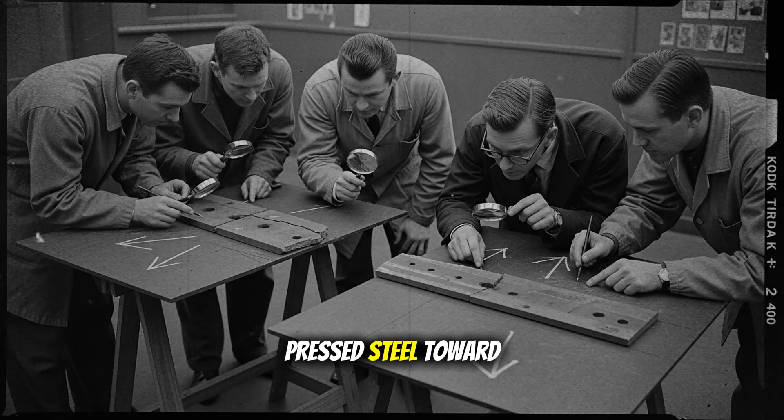The anxiety had been growing as winter spread down from the North Pacific and across the North Atlantic, places where water temperatures pressed steel toward its hidden limits and turned minor flaws into fatal lines racing through a hull. The Schenectady's break, the newspapers noted, came in calm weather just after sea trials, which only deepened the dread. If a ship could break here, what awaited her sisters on the open ocean?

Out at sea, proof would come with merciless clarity on November 24, 1943, when the Liberty ship John P. Gaines broke in two off the Aleutians and sank with 10 lives lost, a catastrophe later tied to the embrittlement of welded steel in freezing waters where toughness vanishes and cracks run unchecked.

Investigators and metallurgists began naming factors: steel quality, workmanship, temperature, stress concentration, while a pattern emerged: ships with long, continuous welds and sharp structural details were prone to sudden brittle failure when cold stripped the metal of its ability to absorb strain. Even near New York in March 1943, the tanker Manhattan reportedly broke in two, underlining that the menace was not confined to a single yard or coast but haunted the entire war-built merchant fleet when the thermometer fell and the stress found a corner to concentrate.

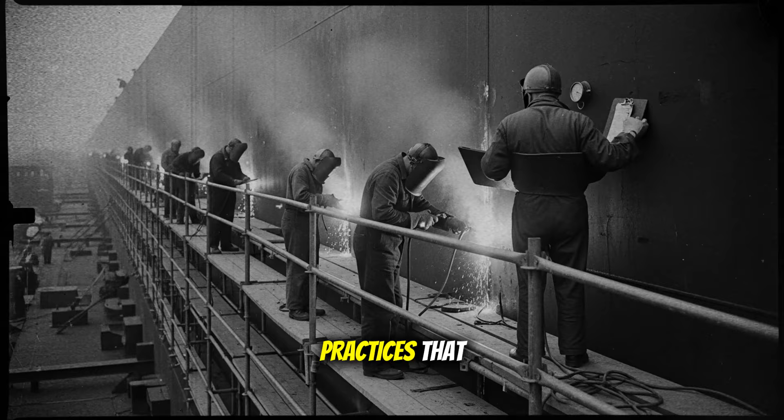The first official explanations leaned on familiar culprits: faulty welding and rushed work, because it felt intuitive that speed had simply outrun quality, and early reports pointed to poor practices that undeniably existed in some yards under punishing wartime schedules. But as the evidence grew, the narrative shifted from blame to mechanism.

What looked like isolated workmanship errors were, in many cases, symptoms of a deeper physics: the brittle fracture of low-toughness steel at low temperature, ignited at sharp corners and accelerated by continuous welds that handed a crack a clear path. Welded construction eliminated the riveted discontinuities that once acted as brakes, so a fissure born at a square hatch corner under residual tension could sprint across a deck and down a side shell before frames or bulkheads could arrest it, especially when the steel's ductility had collapsed in the cold.

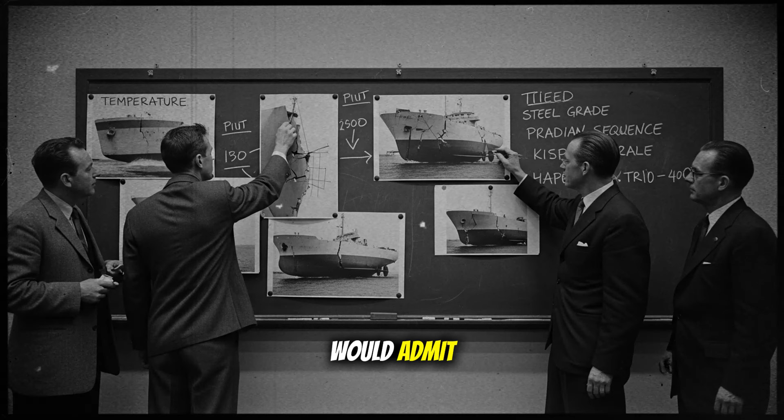That cold mattered more than pride would admit, because steel that bends and forgives in a temperate yard can turn glass hard at sea, crossing an invisible threshold where toughness drops and tiny notches, tool marks, square cutouts, abrupt geometry become amplifiers of stress rather than mere imperfections. In those conditions, a weld's heat history and the sequence in which plates are joined can lock residual tensions into the hull, hiding stored energy in quiet steel until a winter night and a sharp corner give that energy a perfect release.

The shock of the Schenectady's fracture forced leaders to stare at this convergence of design, material, and method, because the ship had met specifications and yet had failed spectacularly, which meant the specifications themselves might be asking the impossible of the metal and the sea.

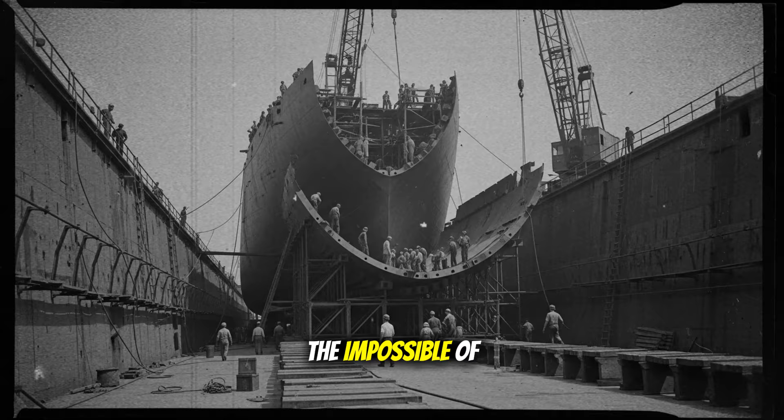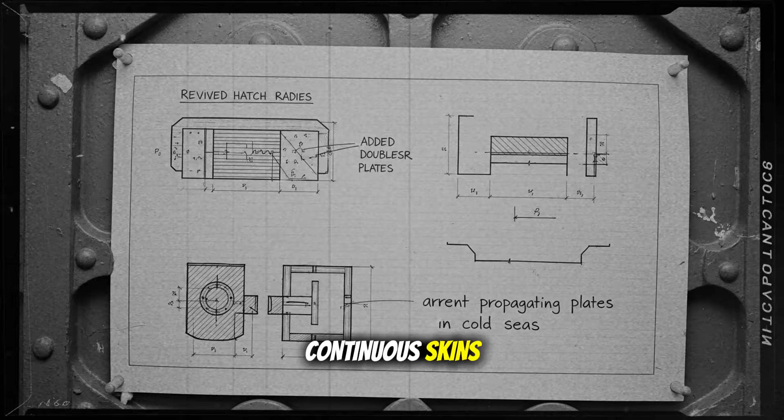Behind the headlines lay the industrial gamble that made such failures possible at scale: an unprecedented shift from riveted to welded ships, prefabricated sections marching across assembly lines where speed was the mission and cargo tonnage the weapon, all orchestrated by new yards like Kaiser's on the American West Coast. The Liberty and T-2 programs had proven that ships could be built in weeks, not months, by welding vast steel plates into continuous skins, a miracle that poured hulls into the Atlantic faster than U-boats could sink them, until cracks began to show that speed carried its own invisible toll.

What rivets once interrupted, welds now connected seamlessly. What corners once rounded slowly by craft, production sometimes squared and punched for efficiency, and the ocean, indifferent to schedules, found every shortcut the moment the mercury fell.

For crews, rumors hardened into fear, because sailors knew that a hull could fail not with a gradual groan but with a single rip, the ship's back breaking in seconds as if an unseen hand had unzipped the steel from hatch to keel in frigid water far from help.

They learned to listen to the language of their vessels, the clicks and thuds and winter creaks, and wondered which sound was harmless and which marked the birth of a crack that would not stop until it met a discontinuity or the sea itself.

Every voyage through cold lanes became a test of unseen properties, of materials and methods decided in yards thousands of miles away, where a choice about a corner radius or a weld sequence might ripple into life-or-death outcomes at latitude 50 north.

The Schenectady's broken back on a quiet river became the emblem for a crisis bigger than one ship, compelling investigators to convene, comb through fractured plates, and re-examine everything from steel chemistry to hatch geometry and the choreography of welders on the line.

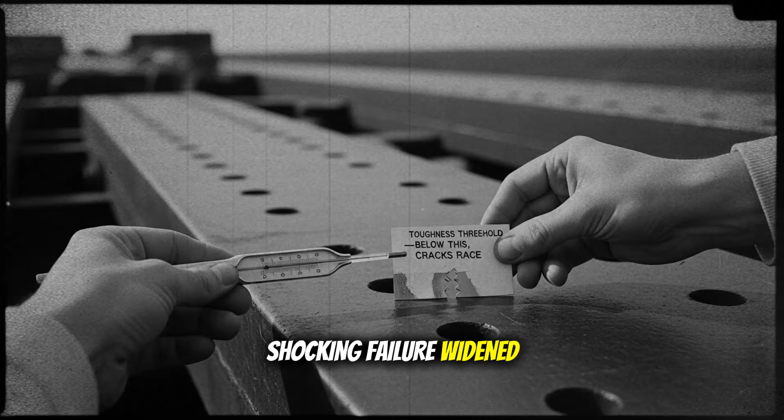What began as a story of a single shocking failure widened into a forensic journey through modern shipbuilding, asking not only what failed but why it failed there and then, and what must change if a nation's lifeline is to survive its own ingenuity.

The answers would take shape in new procedures, new shapes, and new steels, but in that first stunned moment on the Willamette, all anyone could see was a ship torn open by silence and cold, and the realization that the ocean had found a flaw in the way a war was being won.

In the months ahead, the inquiry would turn from spectacle to science, crossing the gap between yards and seas, and laying the groundwork for a transformation that would keep ships from slicing themselves apart when winter pressed down and waves hammered square corners into stress and then into rupture.

Yet part 1 ends where the mystery begins, with the shock, the questions, and the sense that something fundamental about steel, shape, and sequence had been misunderstood, because the ocean had just delivered a lesson no one could afford to ignore.

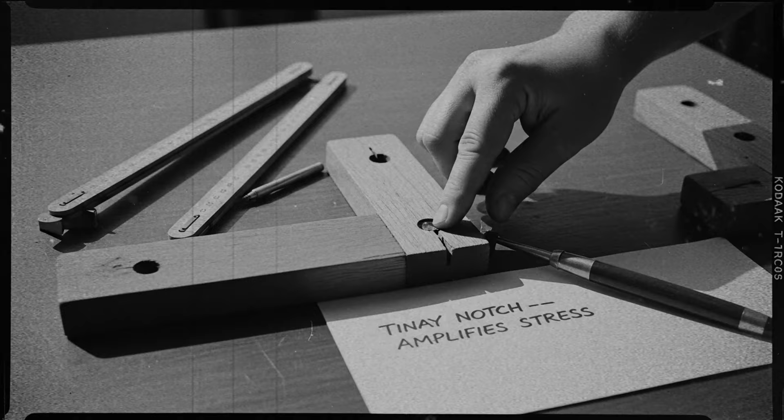The hull on Swan Island was not simply a broken ship, it was a message in twisted plates and a mile-wide echo that demanded a new way to think about building vessels that live where water is hard, wind is sharp, and mistakes travel at the speed of fracture.

In the months after Pearl Harbor, the mandate from Washington was simple and brutal: ships must appear faster than the ocean can swallow them, and Henry J. Kaiser stepped into that order with a promise to bend time itself by turning shipbuilding into a choreographed factory of prefabricated parts and welders moving like clockwork around steel.

He did it at Richmond, California, where 5 quays and a sprawling grid of sheds and warehouses became the bones of a new idea: take the rhythms of Detroit and bolt them onto the waterfront, so that hull sections, deckhouses, and bulkheads could be built all at once and then swung into place by giant cranes with scarcely a pause between. The result was a spectacle of speed.

By late 1942, Liberty ships averaged roughly 6 weeks from keel to launch, a number that sounded like rumor until yards began to post build times like boxing posters, daring each other to beat the bell again and again.

The headline belonged to one ship, the SS Robert E. Peary, assembled in an astonishing 4 days, 15 hours, and 29 minutes, a feat so improbable that it needed no embellishment, just the dates and hours stamped beside photographs of crews in quilted jackets and paper caps watching a hull glide toward the water.

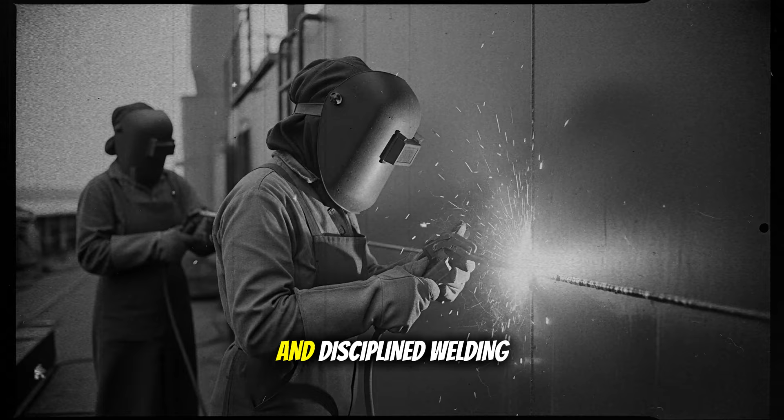Record keepers would later anoint it formal, the fastest completion of a full-sized ship ever, proof that prefabrication and disciplined welding could make steel obey a schedule as if it were a living thing trained to the whistle. But perhaps the more telling number was not the record, it was the typical.

By 1944, the Liberty ship assembly rhythm in Richmond had compressed to a little over 2 weeks, as if the yards had discovered a metronome hidden inside the work itself.

At ground level, the secret was not magic, it was movement, the way pre-made sections arrived like clockwork, lifted by cranes from flat cars and cradled into alignment while welders stitched seams in a sequence designed less by old-time shipwright instinct than by production planners armed with charts and stopwatches.

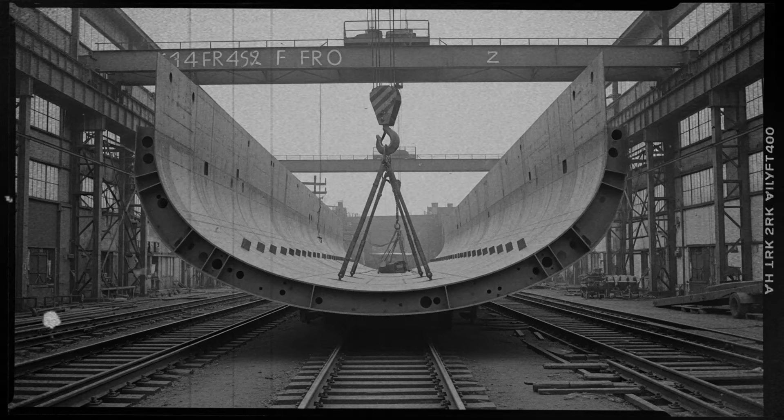Where once a hull grew from the keel upward under a forest of scaffolds, now entire bow and stern modules, engine room blocks, and deckhouses took shape in separate bays, converging on the ways like a convoy timed to the minute.

Kaiser's yards became their own geography of motion, moving steel instead of asking men to climb it, and in that inversion lay the speed that would stuff convoys with cargo when the Atlantic needed ships more than it needed elegance.

The workforce was as new as the method, a mobilization that redrew the boundaries of who could build a ship and how quickly they could learn to do it, with thousands of women, Wendy the Welder in Richmond's parlance, taking up torches and grinders and learning to read heat and fill a seam with the calm certainty of craftsmen who had never imagined such hands at such work.

By 1943, women made up roughly a third of the 90,000-strong Richmond shipyard workforce, sharing the same risks and the same grit, and proving that what mattered most in a crisis was not tradition but throughput, not pedigree but the steady glow of a clean bead in the right place.

The symbol the nation chose was a name and a rolled-up sleeve, Rosie the Riveter, but in Richmond the icon wore a hood and gloves and answered to a foreman with a sequence card, and the ship slid down the ways right on time. Scale magnified everything, including pride.

Across Kaiser's four Richmond yards, more than 747 vessels would be completed, while the broader Kaiser system delivered 1,490 ships, over a quarter of U.S. Maritime Commission output, proving not only that the system worked, but that it could be replicated and multiplied until the schedule itself felt like a weapon.

Those statistics are not mere tallies, they are the minutes saved in the assembly bays, the trains that pulled in with prefabricated pieces at dawn, and the cranes that never idled, because idle cranes threw shadows on a war that could not afford them. Every improvement, jigs that caught a plate at the right angle, dollies that turned a section in seconds, a better sequence for attaching stiffeners, stole hours from the calendar and turned them into hulls in convoy.

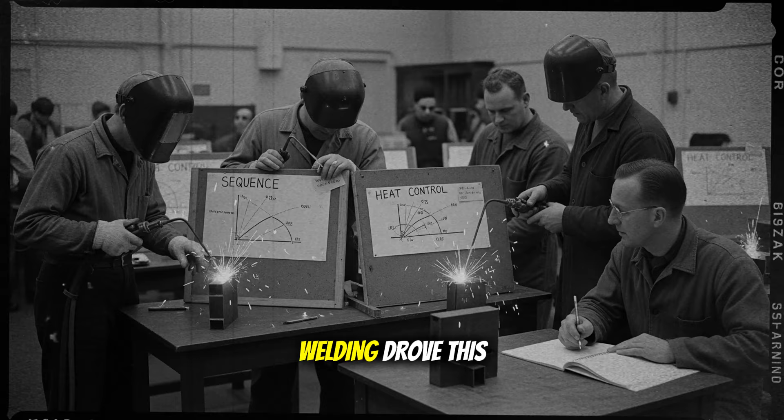The logic of welding drove this revolution as much as the logistics did, because welding closed seams in a single skin rather than lacing plates together with 1,000 hot rivets, and that continuity meant fewer leaks, cleaner interiors, lighter overall weight, and simpler assembly, boons large enough to sweep away the last reservations of those who loved the old ways.

Prefabrication and welding were twins. You could cut and shape a section under cover, fit it to a template, and then carry the whole to the ways and stitch it to the ship in hours, something no riveted tradition could match at that scale and speed. The human body understood this faster than the textbooks.

Welders moved less, repeated more, and the work flowed, miles of seam tamed by repetition until the heat and the puddle felt like a second language.

Propaganda reels and front-page photos celebrated it with an almost carnival glee, American industry conquering time, and the nation believed because it had to believe that one more line of ships would lift the siege on Britain and drown the U-boats in tonnage and wake.

Liberty was no accident of naming. The ships were political vessels as well as cargo carriers, proof that a democracy could become an assembly line long enough to reach both oceans and steady enough to keep its promises.

If speed was a melody, then the chorus was manpower made manifest, brown and black and white, men and women, migrants and locals, all trained to the same sequences in the same bays under the same war-sized clock.

And a crack, born of cold or stress or a sharp corner, prefers a road that does not stop at the next plate but goes on and on until something interrupts it.

Riveting, by contrast, had once littered a ship with intentional interruptions, hard little commas that forced a crack to pause and dissipate, while a welded plate could carry that same crack like a rumor whispered room to room until the whole house knew. None of that was clear in the first dizzy months of scaling up, and perhaps it could not be, because factories do not produce caution, they produce output, and the war measured output in hulls per month and tons per mile, not in the long quiet of a ship flexing safely through winter seas.

The specifications were met, the seams passed inspection, and the schedules turned over like calendar pages in a stiff wind, and then winter came, and with it the revelation that steel has a season and a temperament, and that speed's shadow is the margin it erases.

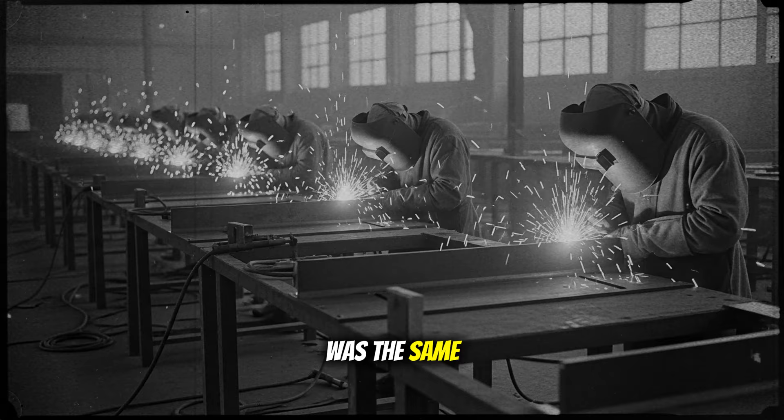Inside the yards, the answer to every new problem was the same as the answer to the last: train harder, move faster, tighten the choreography, and for a time it worked, because movement itself can drown out doubt until the ocean raises its hand.

Rail spurs fed the prefab sheds, and the sheds fed the ways, and the ways fed the river, and on the river a ship became a rumor of its own journey, headed for convoys that needed every ton of flour and fuel they could carry, because the calculus of war was cruel and simple: cargo delivered meant lives saved.

Nights in Richmond, crews lit the sky with orange, chalking out welds by arc light and coffee, learning to feel the pull of cooling metal and to stitch plates without tearing the geometry that planners had arranged by the book.

They could not know that the book itself still needed a chapter about cold and corners and the speed at which a fissure can learn to run, a chapter the ocean would write in gray water and black moonlight far from the whistles of the bays.

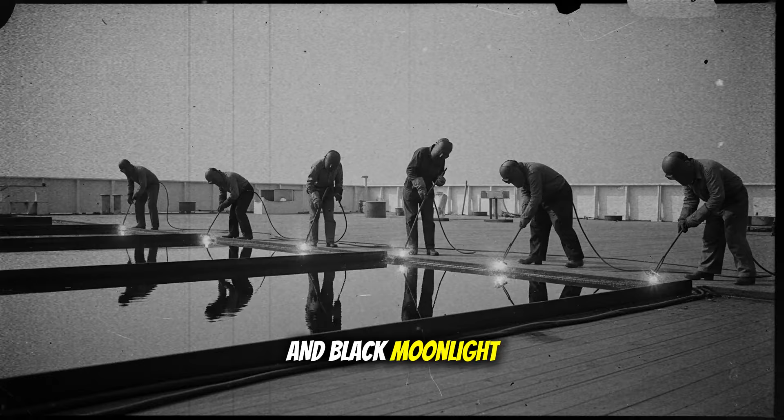Even so, the achievement stands: a nation that had never built at such velocity taught itself to do so, and the evidence was a forest of masts at anchorage and a river of ships sliding off greased ways in Richmond, Portland, and beyond, each born of 1,000 small, repeated motions that made extraordinary feel ordinary.

Speed was not an accident, it was a decision, and the decision brought victory closer by the calendar even as it crept near the edge of what the steel would tolerate, a line unseen until a crack drew it in bright, jagged relief.

What came next would be the second lesson of the war-built fleet, that a miracle of production must be followed by a miracle of understanding, or else the ocean will take back what the factories gave, one quiet night at a time.

The mystery deepened in the months after the first dramatic breaks, because the welds gleamed, the inspection stamps were crisp, and on paper the ships met their specifications, yet hulls still fractured as if made of porcelain when winter bit the steel and a small flaw found a path to run.

Designers pointed to proven plans and qualified materials, and inspectors swore their gauges were honest, but the ocean was not impressed by paperwork, and each new catastrophic crack suggested that something fundamental in the physics of cold steel and continuous welds had been misread.

What began as a suspicion of sloppy work matured into a more unsettling idea: the failures might be structural and environmental, not moral or disciplinary, meaning that even good welds and correct plates could be betrayed by temperature, geometry, and the way stress concentrates at certain shapes.

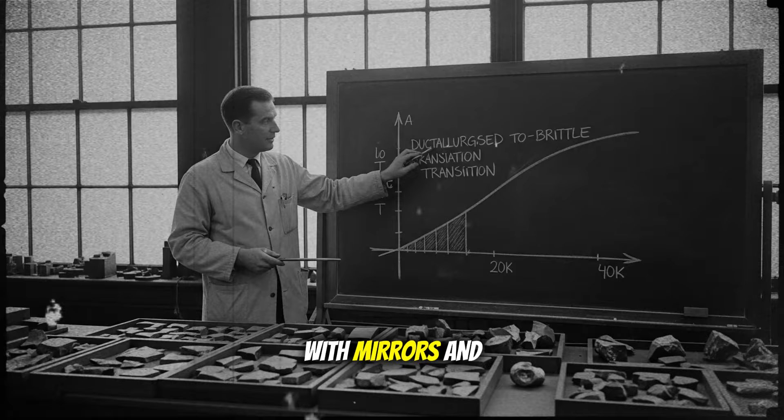Investigators crawled through broken ships with mirrors and chalk, tracing the birthplaces of cracks and finding them again and again at stress risers, square hatch corners, abrupt cutouts, welded intersections, places where the steel's internal loads piled up like traffic onto a narrow bridge with no shoulders.

Each corner acted like a magnifying glass for stress, and when winter chilled the plates toward the ductile to brittle transition, those amplified stresses no longer dissipated through yielding but snapped suddenly into a running fracture that outpaced any human response.

In warm yards the metal bent, in cold seas it broke, and the difference was not a moral failing of a worker but a material truth about toughness, temperature, and the way a continuous welded skin leaves a crack with nothing to interrupt its journey.

Metallurgists reached for language that could hold these events, pointing to notch toughness and the Charpy impact test to explain why steel that absorbs energy at moderate temperatures can surrender that toughness near freezing, turning stress into a clean break rather than a dent or a bend.

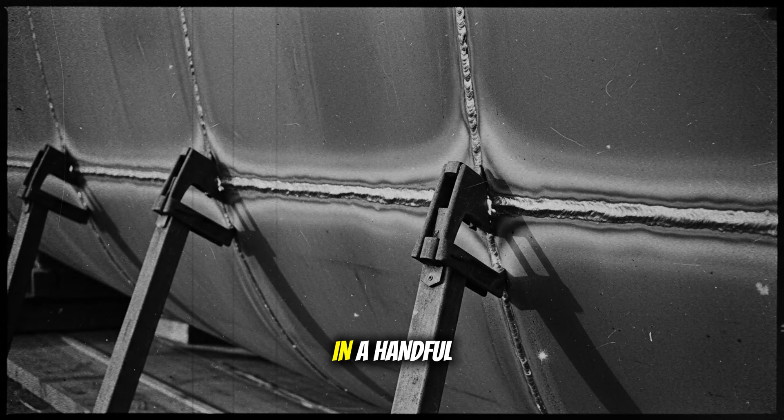They spoke of the ductile to brittle transition not as a switch but as a range, a band where a plate can move from forgiving to treacherous in a handful of degrees, and where defects that were once harmless become seeds of catastrophe when the ship crosses that invisible thermal border.

The conclusion was unnerving in its simplicity: if notch toughness at service temperature is too low, a sharp corner or a weld flaw can become the trigger for failure, and a welded hull gives the fracture a highway rather than a maze.

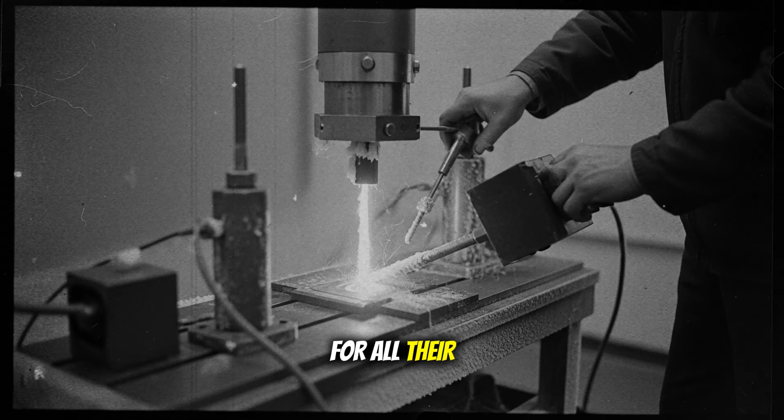This is why riveted ships, for all their weight and leaks, seem to resist the same kind of runaway failures. Rivets and lapped plates built discontinuity into the structure, forcing cracks to pause and spend themselves at each mechanical joint rather than sprint through a single, continuous seam.

By contrast, welded construction, the miracle that made mass production possible, created uninterrupted paths across decks and side shells, pathways along which a crack, once born, could travel until it met a boundary strong enough to stop it, which often came too late in the cold.

Speed had removed the commas and periods in the steel's grammar, and when the sentence of stress ran on in winter, it ended with a jagged full stop that no one wanted to see.

The early debate circled predictable culprits: bad steel batches, contaminated welds, poor training, rushed inspections, because those are things a yard can fix with discipline and time. To be fair, some breaks did start where a flawed bead or a slag inclusion left a notch waiting to grow.

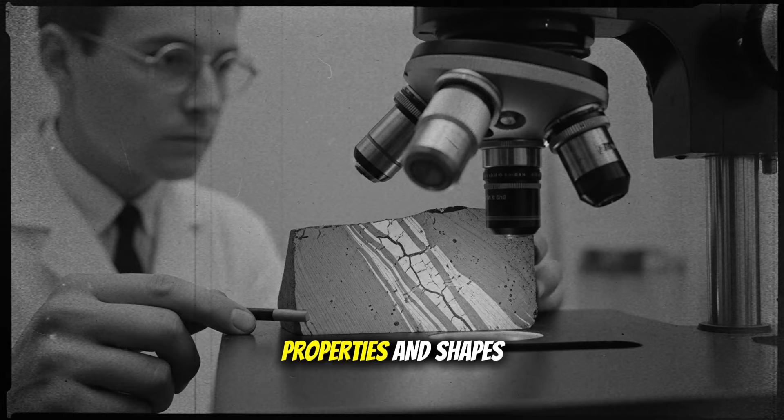But the broader pattern refused to be explained away by workmanship alone, because the casualty rate spiked in cold weather and rough seas, and tests on salvaged plates revealed transition temperatures high enough that the North Atlantic's winter made them notch brittle by default. Blaming hands could not help a hull that had the wrong toughness for its theater, and so the conversation turned to properties and shapes rather than merely to speed and supervision.

Constance Tipper's work crystallized this shift, showing that welded ship steels could fail by brittle fracture at low temperature even when tensile strength seemed adequate, and that fracture was governed by how a crack tip concentrates stress rather than by average loads across a plate.

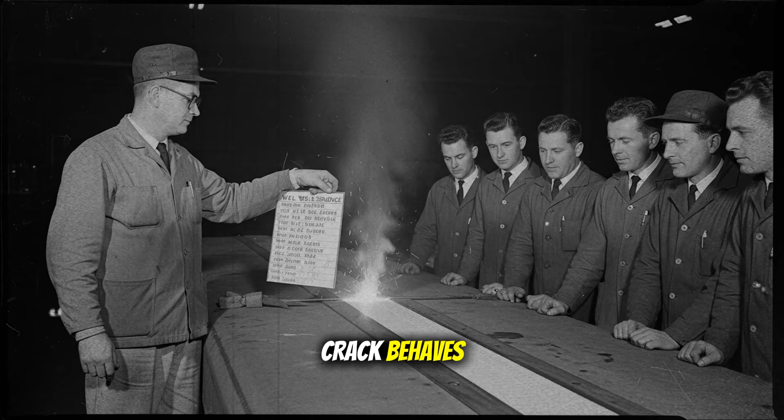Out of such studies grew fracture mechanics, a way to quantify how a crack behaves, to measure a stress intensity factor K and compare it to a material's fracture toughness Kc, and to judge safety not by a single strength number but by whether a flaw can grow under service conditions.

This thinking placed the hatch corner and the weld toe under a microscope, because in those places K shoots upward, and if the sea is cold and the toughness low, the inequality tilts toward failure long before a sailor feels anything under his boots.

Design details that once looked like conveniences, rectangular openings for cargo, snappy cutouts to speed fabrication, turned out to be stress amplifiers, multiplying local loads and guaranteeing that if a crack began, it would begin there, especially under torsion and bending as the hull writhed in heavy seas.

Rounding those corners, thickening at transitions, and softening geometry would become the obvious remedies later, but in the early months the fleet sailed with the squares it had, and the ocean read those squares like invitations.

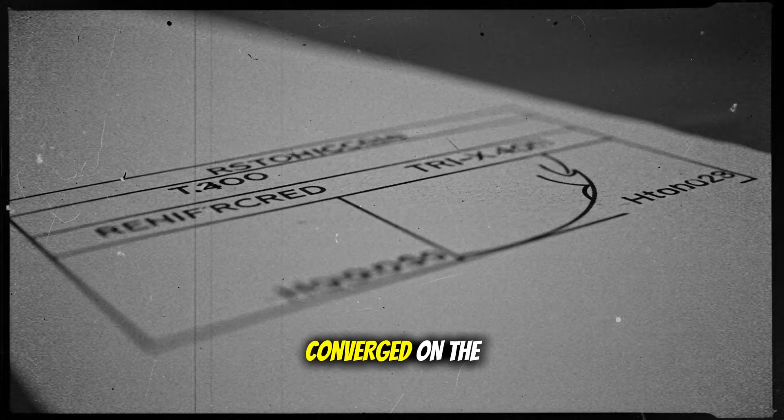Numerical studies and service experience converged on the same lesson: geometry is not decoration on a ship, it is how stress chooses its path in metal that cannot argue with winter or with waves.

Residual stress, the ghost written into the steel by welding heat and cooling, complicated everything, because a plate could be born already tense inside, carrying loads no gauge could see until the cold made them matter and a notch gave them a voice.

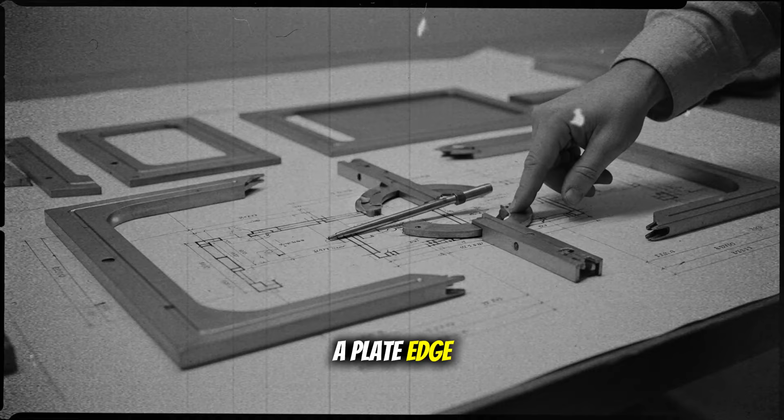When investigators mapped crack paths after failures, they often saw how internal tensions aligned with external bending to push a flaw across a seam and into a plate edge, accelerating a fracture that might otherwise have stalled in warmer water or at a riveted splice.

In some Schenectady accounts, residual stress was singled out as the main driver, a reminder that sequence and heat history are not footnotes to design but part of the structure's fate.

Routing changes tried to buy safety by steering vulnerable ships toward calmer, warmer routes, tacitly admitting that the steel, the shapes, and the welds were not yet aligned with the seas they had to face, even as design modifications waited their turn in the drafting rooms.

At the same time, classification rules and specifications began to evolve, calling for impact-tested steels with lower transition temperatures so that toughness would remain in the tank when the barometer fell and the spray froze on the guardrails.

The fleet was learning, painfully and publicly, that safety at sea begins long before launch day, in metallurgical choices and corner radii that decide whether stress will be stored, released, or relieved when the ship meets winter.

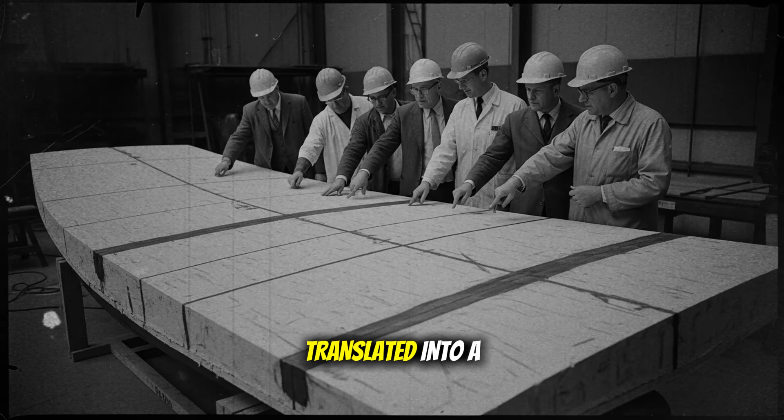For crews, all of this translated into a new superstition that was really physics in disguise: avoid the cold lanes if you can, watch the corners if you cannot, and listen to the hull at night, because the first sign of a brittle world is a sound too clean for comfort.

For the yards, it meant that the next generation of ships would have to be drawn with rounded geometry and built with procedures that bleed stress away before the ocean collects it, turning production miracles into structures that can suffer without shattering.

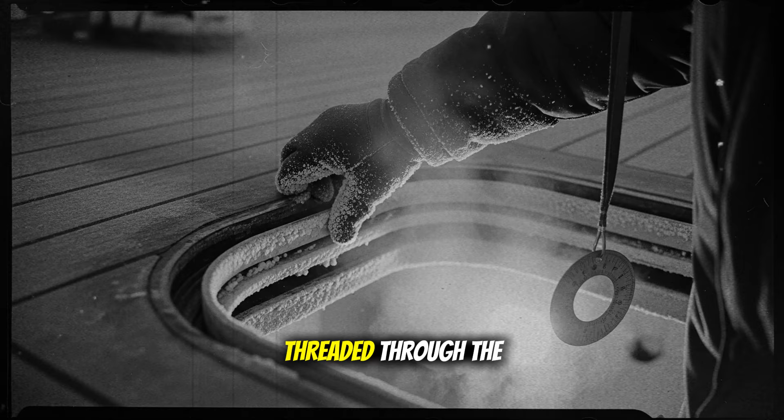Between those realizations lay the pivot from mystery to method, from guessing at blame to measuring at the crack tip, and that pivot would shape everything that followed, from redesigned openings to deliberate crack arresters threaded through the length of a hull. The investigation no longer asked merely whether a weld was good, but whether the steel stayed tough at the temperatures it would meet, whether the corner multiplied stress beyond forgiveness, and whether the structure contained an intentional interruption to stop a running flaw before it reached the keel.

In the end, the enigma of ships that broke in calm water was resolved not by a single culprit but by a chorus: cold that steals ductility, corners that hoard stress, continuous welds that offer a perfect road, and residual tensions waiting for a reason to move.

The cure would be plural too: better steels, kinder geometry, planned discontinuities, and a new respect for the way welding writes its own history into the metal, because the ocean does not grade on a curve, and winter does not negotiate.

Inside the prefab shed, a night's work began with a hiss and a bloom of light, and welders learned early that the order of their beads could teach the steel to lie straight, or to pull itself into a quiet, dangerous twist that no level could deny by morning's inspection.

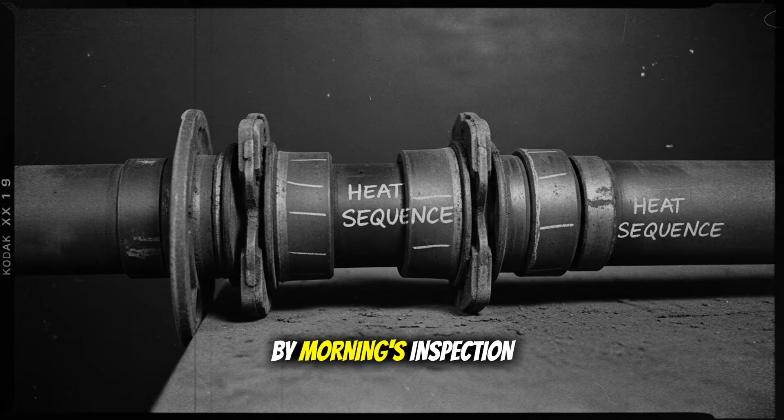When a long seam was run from one end to the other without pause, cooling contraction tugged the plates into a bow, and even when the eye could not see the curve, residual stresses accumulated along the weld toe like ghost loads waiting for a reason to move when cold seas and hull bending gave them one.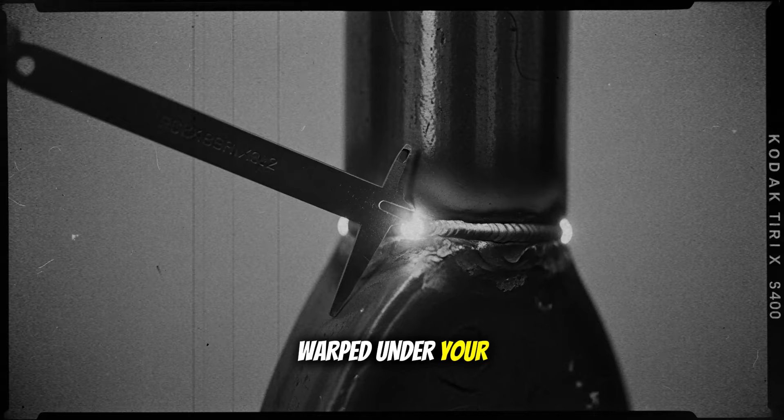The discovery was tactile before it was theoretical: set the sequence wrong and the panel warped under your gloves, set it right and the piece relaxed into place, proof that welding is not only joining but also writing invisible history into the metal with every heat cycle and every pause chosen by the torchman.

Residual stress is the mark left by heat that expands the steel beyond its neighbors and then forces it to shrink back against colder material that refuses to follow, locking tension into the microstructure that cannot be measured by a tape but manifests when service loads and temperature conspire to add one ounce too many.

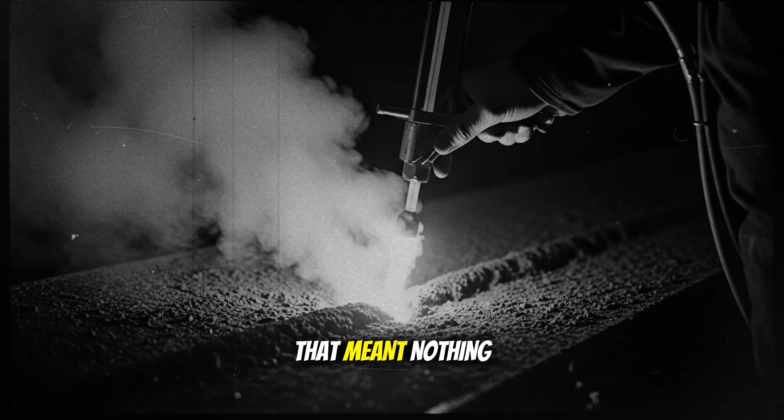In ship hulls, those locked-in tensions whittle away safety margins because a plate that begins under longitudinal pull needs less ocean to reach its limit, and when the thermometer falls toward the ductile to brittle transition, the same internal tension that meant nothing in the shed becomes fuel for a crack once a notch provides a spark.

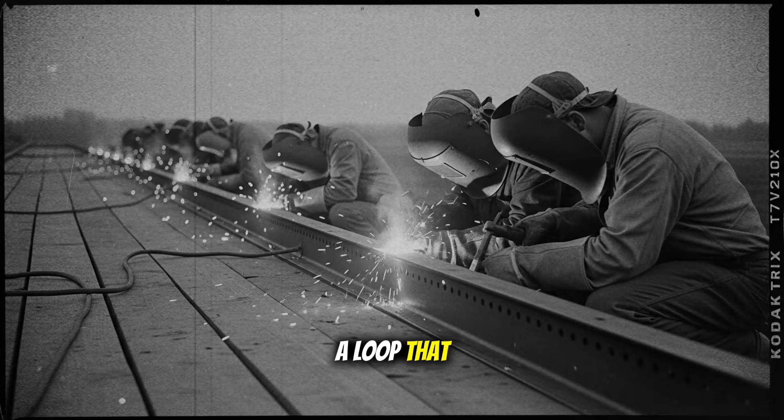The welder's dilemma, then, is a choreography problem disguised as metallurgy: weld in an order that spreads heat and contraction so the stress bleeds to the edges, not the center, alternate sides and seams, let sections cool before closing a loop that traps strain in the worst possible place.

Analysts later mapped these instincts to numbers, showing how different sequences redistribute transverse and longitudinal residual stresses, and how alternating weld lines or skip welding could cut peak stresses at the weld toe where cracks love to begin under cyclic bending at sea.

Finite element studies on stiffened panels confirmed what fitters had sensed for months: that residual stresses and distortions reduce ultimate strength by double-digit percentages in the wrong combinations, and that controlled sequencing and restraint can recover a surprising share of that lost capacity before the hull ever leaves the ways.

Even choices that minimize distortion did not always minimize residual stress, a trade-off that forced planners to balance flatness, lock tension, and fatigue life instead of chasing one metric that could betray them in winter swells.

On deck plans, certain shapes betrayed the ship every time, and welders knew their names by where the cracks began: hatch corners cut square for speed, sharp transitions at gun tubs or deck openings, and intersecting seams that bundled stress like a fist clenched in steel.

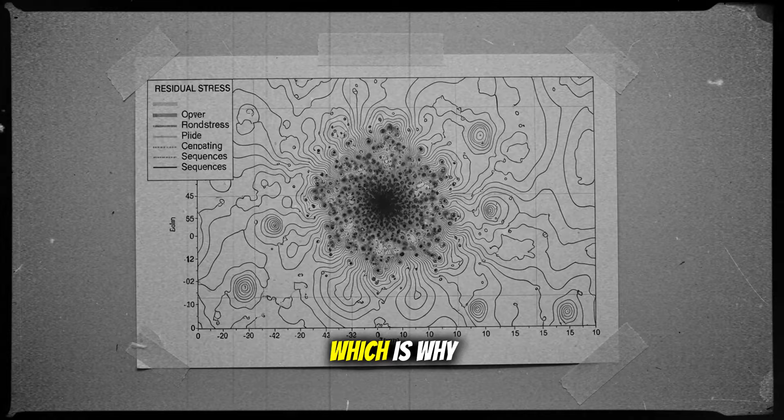A square corner is a magnifier, and under longitudinal bending and torsion, it piles extra stress at the radius that does not exist, which is why the sea often traced the first bright line there when plates were cold and residual tension was already humming under the paint.

Rounding those corners is not ornament, it is a structural lullaby that lowers the stress concentration so a hull can flex without turning a notch into a fault line when the ship shoulders into a beam sea in February.

Riveted ships once survived because their skins were full of interruptions. A crack had to fight to cross a line of rivets and overlapping plates, while an all-welded hull offers a continuous roadway along which a flaw can accelerate until something deliberate stops it, if anything deliberate was placed at all.

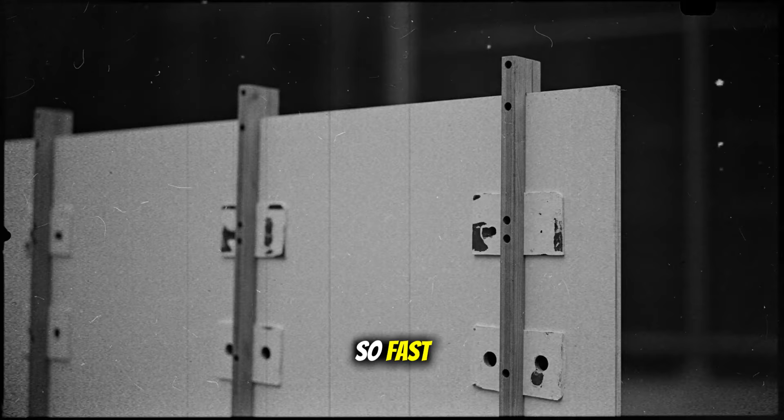Welding delivered the miracle of speed through continuity and prefab blocks, but that same continuity is what makes a crack so fast once it is born, which is why later remedies deliberately inserted crack arresters at intervals, conceding that sometimes the safest path is to design for failure to halt rather than never begin.

To the welder at the panel, this translated into procedures that felt fussy in the moment: start at the center, alternate positions, stagger heat input, respect interpass cooling, but paid dividends at sea where the only inspector left is the wave that measures every shortcut without mercy.

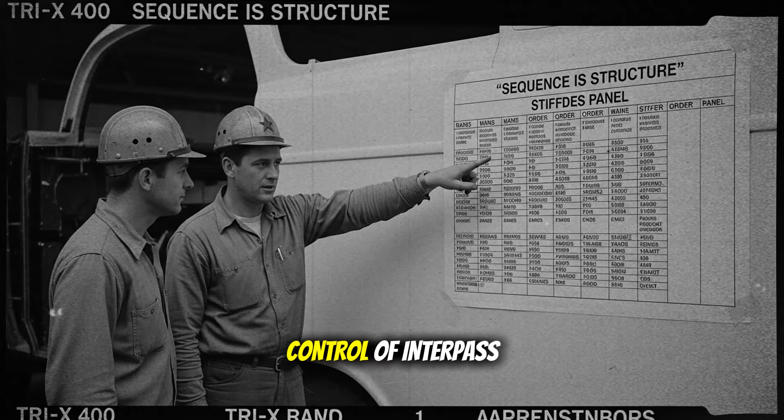Control of interpass temperature became a kind of discipline inside the discipline, because overheat the region and the grain grows and the toughness falls, while rushing passes without letting heat soak and dissipate compounds the very residual tensions the sequence was meant to cure.

Sequence cards and chalk marks on jigs were not bureaucracy, they were the difference between a module that arrived flat and calm and one that needed to be forced into alignment, carrying hidden resentment that the ocean would exploit at the first cold snap.

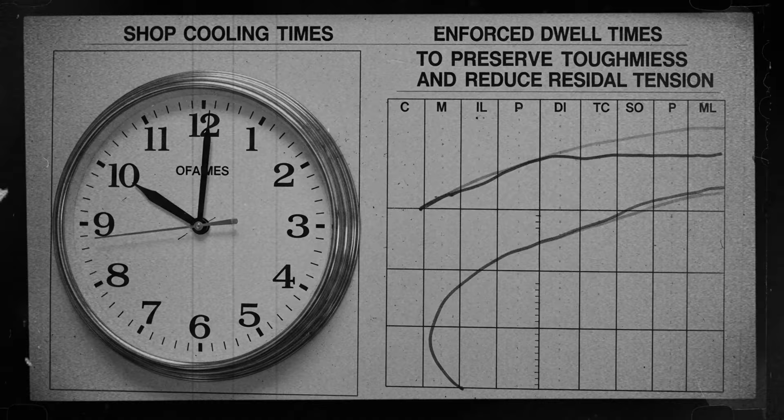The better the choreography in the shed, the kinder the ship's behavior in winter, because a hull is only a sum of plates and welds, and if those pieces begin their life already arguing, the sea will referee with a verdict no captain can appeal.

In failure investigations, fracture paths often traced back to weld toes at openings, or to places where intersecting seams concentrated stress in three directions at once, and post-mortem measurements of plate flatness told the same tale of sequences run straight through rather than balanced across the geometry.

Where studies compared alternate sequences, the patterns were clear. Alternating directions and distributing beads symmetrically lowered peak transverse residual stress by significant margins, especially near toes and heat-affected zones where microscopic flaws are most dangerous under bending.

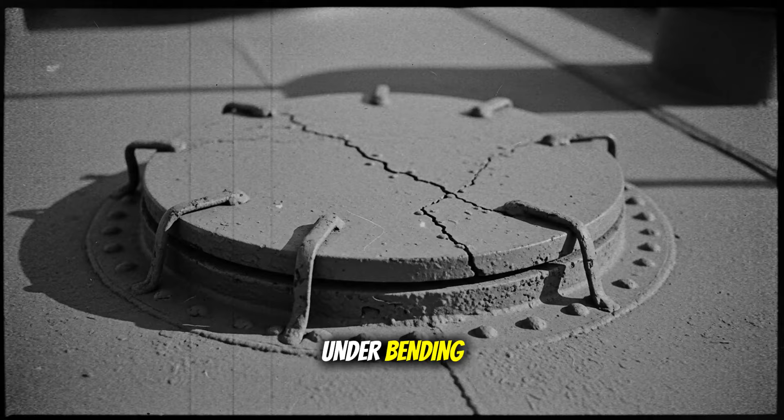These insights did not absolve workmanship, they refined it, turning good welding from a matter of neat beads into an orchestral problem of when and where to play each note so the music does not sour in the cold.

Shop veterans had a phrase for it: let the steel breathe. And while that sounds mystical, the physics is sober. Each weld expands then shrinks a strip of metal, and if those strips are pulled in the wrong order, they clamp a panel like a tight drumhead, ready to split along the first scratch that lines up with the load.

Run a long seam to the bitter end without relief and the contraction tethers the plate to a straitjacket of its own making, whereas stitching the seam in balanced increments lets contraction cancel itself and leaves the panel with far less reason to betray the ship later.

Nothing about this is romantic, and everything about it is practical, because what begins as a decision about where to strike an arc becomes, months later, a question of whether a crew hears a harmless tick or the start of a line that will not stop until daylight.

The welder's vantage point also exposed a final irony. Speed is not only how fast a bead runs, it is how cleverly time is spent between beads: cooling pauses, alternating sides, and staging modules so every joint is made under conditions that favor toughness and flatness rather than throughput alone.

Done well, this invisible patience saves more hours than it costs, because modules that arrive stress-relieved and true do not fight the ship on assembly, and ships that do not fight themselves at launch are less likely to fight the ocean to survive the winter lanes.

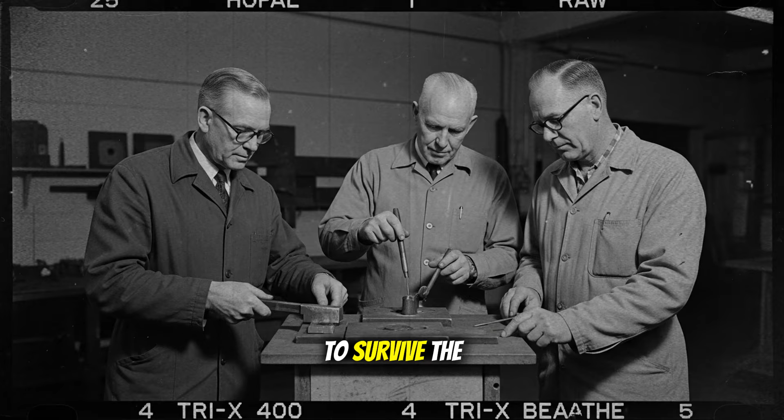In the end, the frontline lesson was stark and transferable. Sequence is structure. Heat is history. Corners are choices. And continuity is a promise that must be interrupted on purpose if a flaw is ever born, because the ocean is always reading the blueprint we wrote in light and steel long before the keel touched water.

The turning point began not with a single memo but with a reckoning. If ships could break in calm water, the war could be lost in spreadsheets and steel. So Washington chartered a board of investigation in 1943 to probe design and construction of welded merchant ships, a move that birthed the Ship Structure Committee to pursue root causes instead of rumors.

Chaired under the Secretary of the Navy's authority and drawing leaders from the Coast Guard, Bureau of Ships, the Maritime Commission, and the American Bureau of Shipping, the board treated brittle fracture as a national emergency, formalizing a program of research and standards that would change how ships were drawn and built from keel to mast.

The message to the yards was plain and hard: fix the problem at its sources, design geometry, material toughness, and fabrication practice, or winter seas would continue grading the fleet on failure rather than on speed.

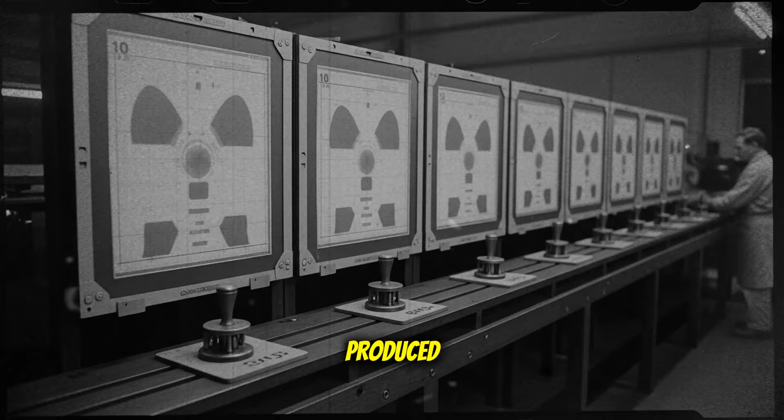At Richmond, where Kaiser's system had already reinvented the calendar with prefabrication and round-the-clock welding, the correction took shape as orchestration rather than heroics, more discipline in how modules were produced, tighter inspection regimes, and a production flow that privileged structural integrity alongside throughput.

Prefabrication was preserved but matured. Bigger subassemblies were built under cover with better jigs and staging, then married on the ways with an eye toward alignment that reduced fit-up forcing and the hidden tensions it leaves behind.

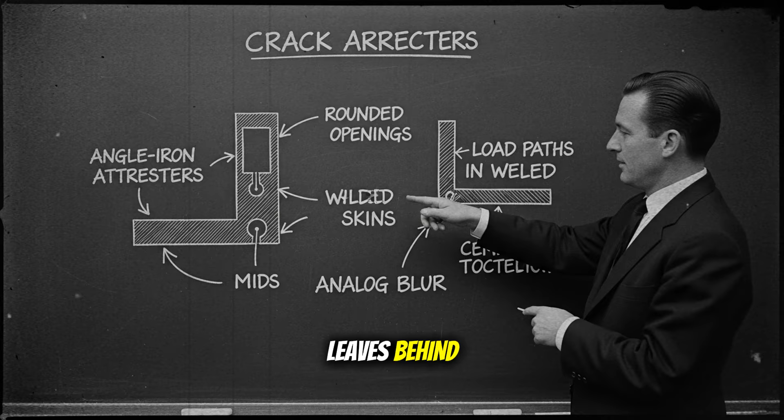The yards did not abandon what made them fast. They tuned it, turning the assembly line into choreography where parts arrived truer, inspections cut deeper, and the sea was treated as the final auditor rather than an afterthought.

The strategic pivot crystallized in a new class of ships whose very lines announced a different philosophy. Victory-class cargo vessels, laid down in Richmond beginning January 17, 1944, were conceived to be stronger in the ways that mattered and faster in the lanes where speed itself was survival.

Their propulsion modernization, oil-fired steam turbines in most hulls, pushed sustained service speeds into the 15, 17 knot range, a decisive leap beyond Liberty performance that shrank exposure time to U-boat waters while carrying the same lifeblood of cargo.

The speed read as confidence, but the real confidence was structural, a hull meant to flex with the sea rather than fight it to the breaking point.

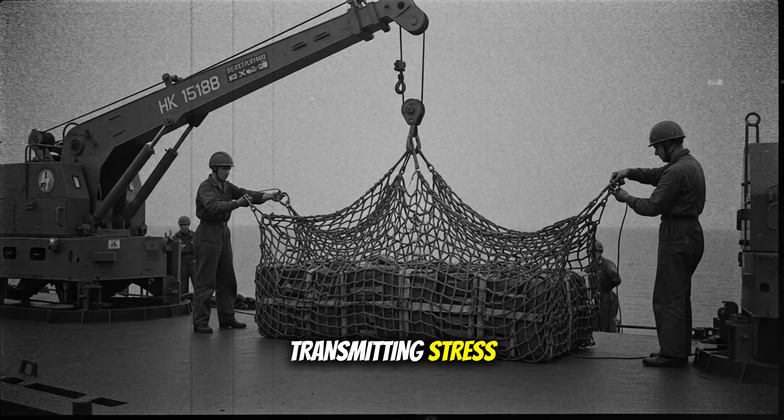Where Liberty ships had frames on 30-inch centers that made hulls stiffer and prone to transmitting stress, Victory ships widened frame spacing to 36 inches, trading a bit of rigidity for a valuable ability to absorb and distribute wave-induced bending without concentrating loads to the point of fracture.

The choice acknowledged the ocean's terms. Continuous welded skins need controlled flexibility, and the Victory's framing geometry wrote that lesson into steel so bending was work the ship could do, not a bill coming due in a single cold instant.

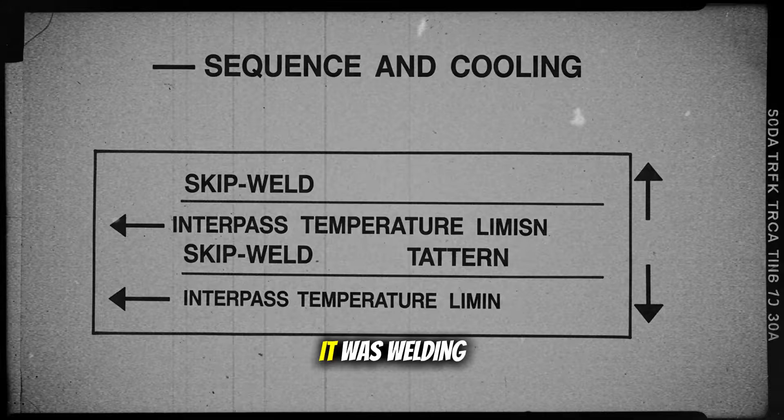This was not a rejection of welding, it was welding with a structural strategy, a hull that bent enough to keep its promises when winter demanded proof.

Designers also embedded arrest features and details that acted like speed bumps in a welded world, with angle iron crack arresters placed at vital locations to prevent a local flaw from sprinting across decks and side shells as it had in the worst Liberty casualties.

A raised forecastle improved seaworthiness by shedding green water that once pounded the well deck, moderating repeated stress cycles that add up over weeks into the kind of cumulative fatigue a brittle plate cannot forgive in February.

Even cargo handling changed character, 7 sets of cargo gear across 5 hatches, electrically powered winches, and refined layouts that balanced service efficiency with structural continuity rather than treating those priorities as enemies.

The act of redesign rippled backward into the sheds, where process discipline tightened because the new ships could only meet their promise if the modules that fed the ways arrived straight, within tolerance, and already screened for the kind of defects that winter loves to find.

Welding practice and inspection became more exacting, with the understanding, reinforced by wartime investigations, that brittle fracture is a system failure, temperature, geometry, residual stress, and flaws must align, so the task was to disrupt that alignment at every step.

Welding's advantages remained, but the yards conceded what the ocean had taught. Inspections demand greater attention for welded skins, and the cost of vigilance is less than the price of a hull that unzips at sea. The context for this zeal was brutal arithmetic.

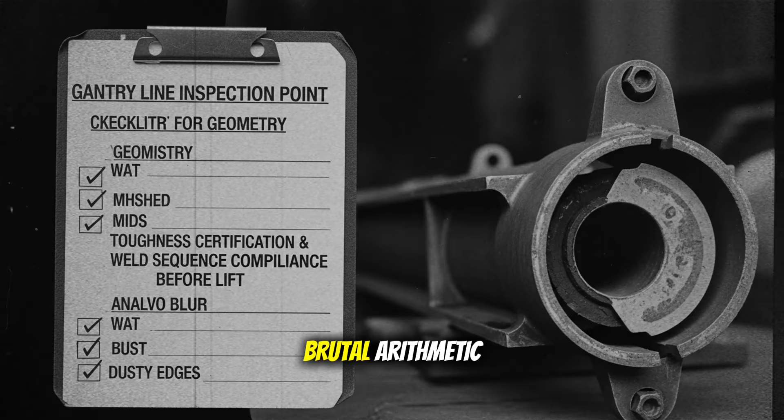Brittleness and cracking afflicted a large share of the Liberty fleet to one degree or another, a reality that forced planners to treat crack prevention and arrest as primary design goals rather than late-stage fixes.

That admission also reframed speed, no longer an idol in itself, but a measure that had to be reconciled with toughness at service temperature and details that diffuse stress where the hull is most vulnerable.

The Victory template thus represented a pact between factory and ocean: keep the tempo, but build elasticity and arrest into every span so the sea finds no straight line to ruin.

Leadership's clearest contribution was structural humility elevated to policy: accept that the hull must flex, that cracks must be trapped before they grow, and that process control in the shed is as vital to survival as horsepower in the engine room. Frame spacing is only a number until night seas set the ship on a long bend.

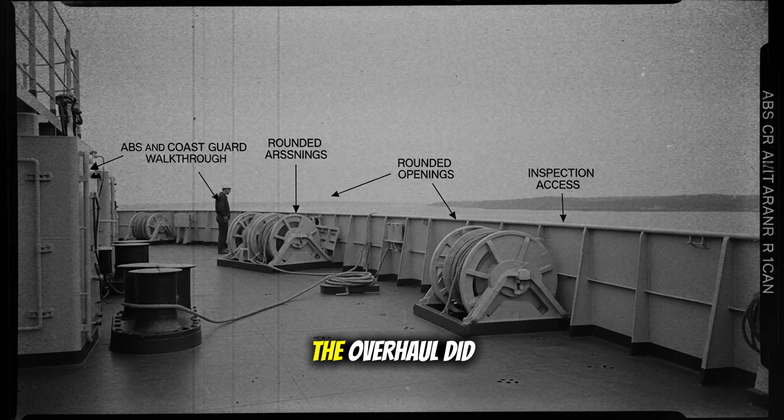Crack arresters are only angle irons until a bright line pauses at their edge, and prefabrication is only a miracle until a module arrives carrying tension it should have bled in the bay, not offshore. The overhaul did not simply make ships faster or prettier, it made them survivable by design, a lesson purchased on the ledger of earlier fractures and paid forward in hulls that could suffer and still come home.

By late 1944, the difference was visible in silhouettes and measurable in service. Victories ran harder and arrived more intact, testifying that the fix required a system, from committee rooms and drawing boards to sheds and gantries, aligned around toughness, flexibility, and interruption of failure paths.

What began as a crisis of confidence in welded ships became a disciplined language for building them right, with the Maritime Commission, naval bureaus, and yards working from the same grammar of cold, corner, and crack, and writing fewer tragedies into the wake. The pivot was never about abandoning speed, it was about earning it back under winter skies.

The redesign began where stress made itself visible, at the edges and openings, in the ways a square corner punished steel, so shipwrights took erasers to right angles and replaced them with radiused hatch corners that turned stress spikes into gradients the metal could carry without turning brittle silence into a sprinting crack.

Tests and service records from the post-war analysis of hatch corner designs confirmed what welders and sailors had learned the hard way: careful attention to corner geometry dramatically improved performance, with rounded coaming arrangements proving far less prone to initiating fractures than the hard 90-degree intersections that had haunted earlier decks.

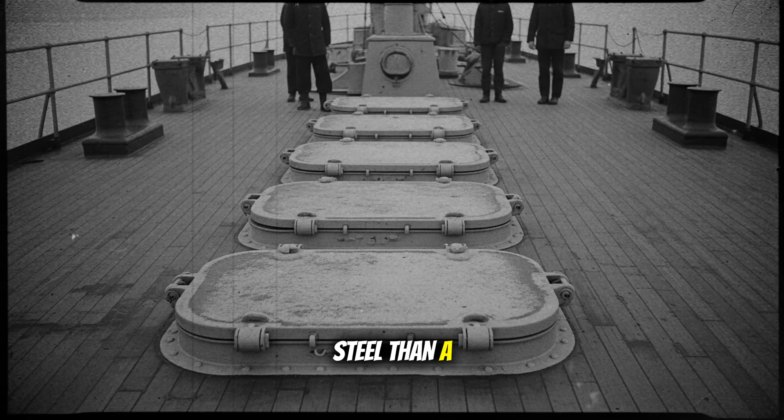It was a change anyone could see walking a Victory's deck: corners softened not for beauty but for survival, and beneath that curve lay a simple truth: the sea reads geometry, and a circle is kinder to steel than a square when winter asks a ship to bend without breaking.

The hull's inner rhythm changed too, with frames pulled farther apart, 36 inches rather than the Liberty's 30, so the structure could flex with the sea instead of bracing against it until something snapped, a deliberate trade of stiffness for resilience written into the class from the design stage.

That extra space between frames reads like a small number on paper, but in a welded hull it is a different philosophy: permit global bending to spread loads and avoid concentrating them where cracks are born, especially in way of openings and long welded runs.

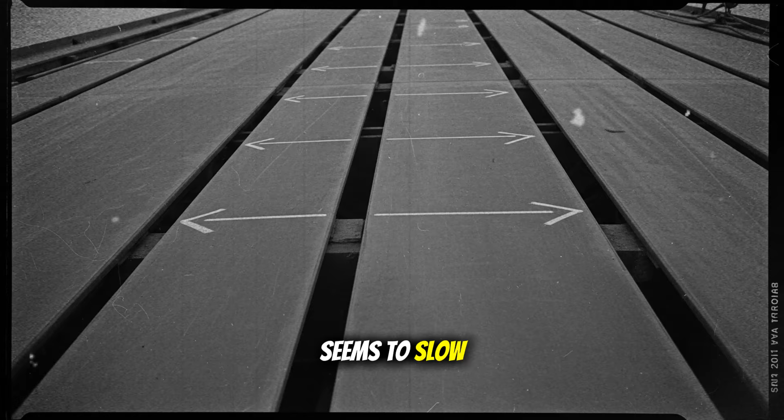A welded ship cannot rely on riveted seams to slow a flaw, it must instead shape its skeleton to share punishment, and the Victory's wider frame spacing answered that challenge with a structure that worked with the ocean rather than against it.

Along the length of deck and side shell, designers added deliberate interruptions to continuity, crack arresters that act like speed bumps for fractures, because a welded plate offers a perfect road unless something engineered stands in the way to absorb and stop a running flaw.

These arresters, typically in the form of plates or strakes embedded to match the surrounding thickness, were placed strategically along midship spans where global bending is worst, sized and located so they could halt a moving crack rather than merely watch it pass by. Design guidance matured to specify width and arrangement so that reloading after arrest would not simply reinitiate tearing, elevating crack arrest from a hopeful detail to a quantified defense written into the ship's backbone.

Not every interruption needed to be heavy, some were simply smarter seams and transitions that refused to draw hard lines in the steel, improving local details so a deck beam met a hatch coaming with tapered loads rather than abrupt knuckles where stress could pile up and wait for a cold night.

The Ship Structure Committee's push for improved hull details codified small changes that paid large dividends: gentler cutouts, fair transitions, brackets, and doublers shaped to ease stress, turning 1,000 tiny hazards into 1,000 small safeties.

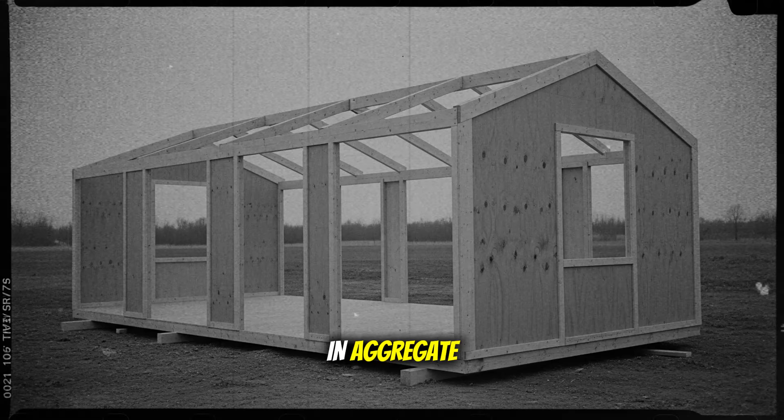In aggregate, the details rewrote how a ship feels stress at the places sailors walk and work, taking the edge off every edge until the deck itself was less eager to betray the hull under winter bending.

Above the waterline, the silhouette changed to spare the structure below, with a raised forecastle on many Victories reducing boarding seas that once hammered well decks and drove relentless fatigue into the forward structure on Liberties.

Less green water on deck meant fewer violent cycles transmitted through hatch corners and deck plating, marrying seakeeping to structural longevity in a way that made sense to engineers and to crews mopping ice in February. Cargo arrangements were refined as well: 5 hatches serviced by 7 sets of gear with electric winches, balancing operational tempo with cleaner structural paths so service speed did not come at the cost of stress hotspots.

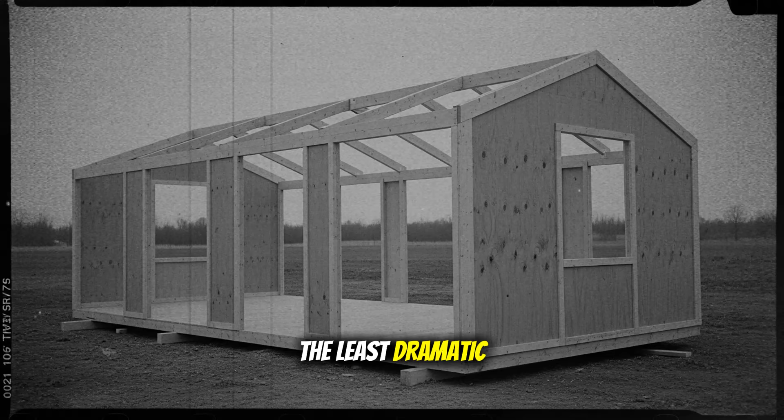The most elegant fixes were often the least dramatic: a radius here, a doubler there, a coaming that carried stress down into a deck girder gradually rather than dumping it at a weld toe, all of it guided by the same principle that smoothed the hatch corners: the sea punishes spikes, so draw curves.

Where rectangular openings remained necessary, designers learned to square only the cover at the coaming top while keeping the structural corner rounded beneath, preserving function for cargo while protecting the strength member from the worst stress concentration. This kind of layered design, geometry for operations above, geometry for strength below, turned compromise into craft, acknowledging that ships must work as well as survive.

Beneath the skin, structural continuity was tuned rather than taken for granted, with designers accepting that welded continuity is both a gift and a threat, and answering it with planned discontinuities, arresters, transitions, segmented paths, so a flaw would burn out before it found a straight road.

Guidance evolved to place arresters along the central 3/5 of the vessel where bending is most severe, not as an afterthought but as an integral belt within the ship's mid-body, quietly ready for an emergency no one wants to meet. By matching arrestor thickness to surrounding plating, detailers avoided creating new stress risers at the very place meant to save the ship, an example of how every fix must be drawn to do no harm before it does its good.

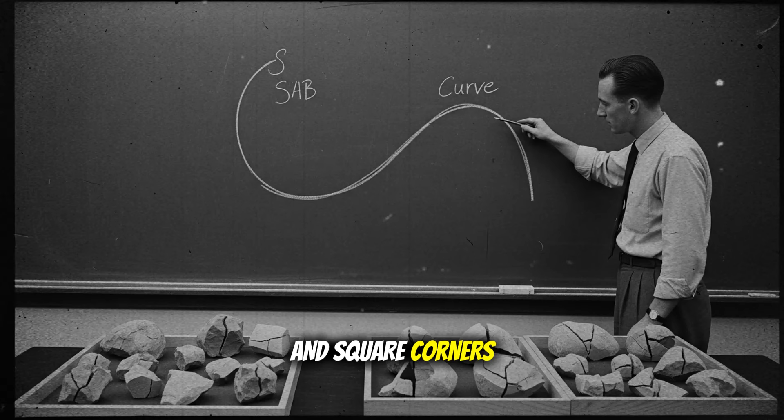Investigators tied the crisis to low-notch toughness at low temperatures, with cracks igniting at weld toes and square corners, then racing across continuous plates fueled by residual stress and a steel that had slipped below its ductile to brittle transition range. From that moment forward, impact toughness and the transition curve, not just room temperature tensile tests, became the compass for any ship steel meant to survive the North Atlantic in February.

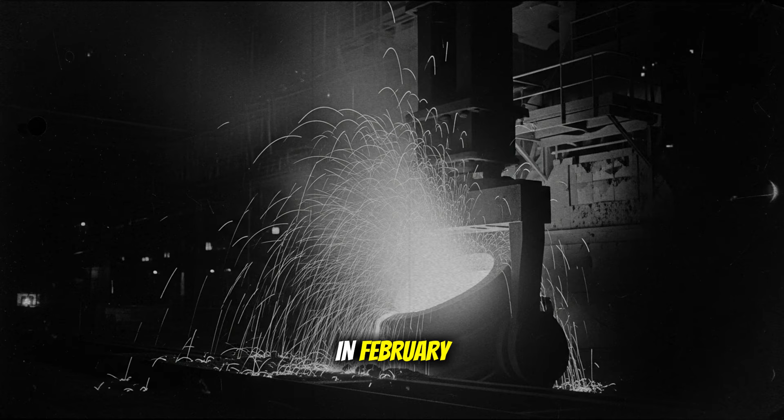The Charpy impact test emerged as the yardstick for this new thinking, a simple, standardized hammer blow that measured energy absorbed by a notched specimen and traced out the S-curve of ductile to brittle transition across temperature. This test, refined and maintained by NIST and others, made it possible to select steels whose absorbed energy remained high in cold service, shrinking the transition temperature so that winter seas did not turn the hull into glass. Where old specifications spoke in ultimate strengths, new requirements spoke in impacts and transition bands, translating a ship's fate into joules at the notch, because that is where fractures begin in the real world.

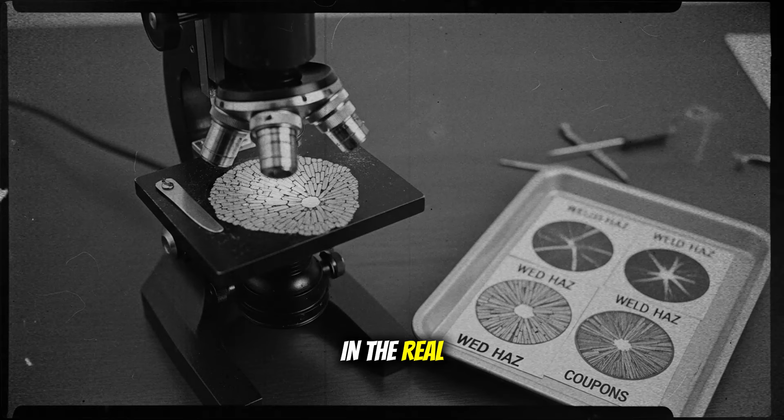Metallurgists attacked the problem where it lived, in chemistry and microstructure, lowering carbon and boosting manganese to improve low-temperature toughness while cutting impurity levels that raise transition temperatures or embrittle weld zones. The principle is well established: manganese strengthens the ferrite matrix and ties up sulfur as MnS, while a lower carbon content and cleaner steel reduce brittle phases and notch sensitivity that conspire against impact energy at low temperature.

Industrial guidance born from these crises pushed plate makers toward fully killed, fine-grained carbon-manganese steels to guarantee weldability and toughness tailored to service conditions, not just to heat numbers on a mill cert. Killed steel mattered because deoxidizing with aluminum or silicon prevents gas porosity and promotes fine grain, raising toughness and delivering predictable impact behavior down in the cold range where the fleet actually sails.

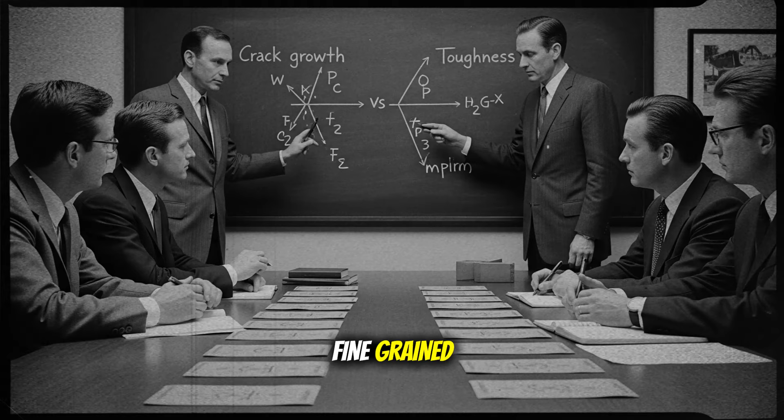Fine-grained, fully killed steels resist cleavage fracture more effectively, shifting the transition to lower temperatures so that a hatch corner in January is less likely to launch a running crack. This is the quiet alchemy of safety. The steel's birth chemistry and deoxidation practice determine how it will behave years later, when stress and cold arrive together under a black sky.

Nickel and other alloying strategies added another lever, because small additions of nickel are known to improve low-temperature toughness in ferritic steels by stabilizing tougher microstructures without sacrificing weldability when carefully balanced. Modern research and naval practice alike show that composition tuning, manganese for strength and sulfur control, nickel for low-temperature toughness, controlled carbon for weldability, can move transition temperatures by tens of degrees, which is the difference between a flex and a fracture at sea. What the war forced was not exotic steel so much as appropriate steel, calibrated for the thermal reality of the North Atlantic instead of the comfort of a warm yard.

The brittle failures also pushed engineering toward fracture mechanics, reframing safety as a comparison between the crack tip stress intensity K and the material's fracture toughness Kc, not simply as an average stress versus yield strength problem. This shift explained why ships could fail suddenly below the transition. Once a notch forms and K exceeds Kc at low temperature, the crack accelerates regardless of the nominal stress the rest of the structure can still carry, especially in a continuous welded skin.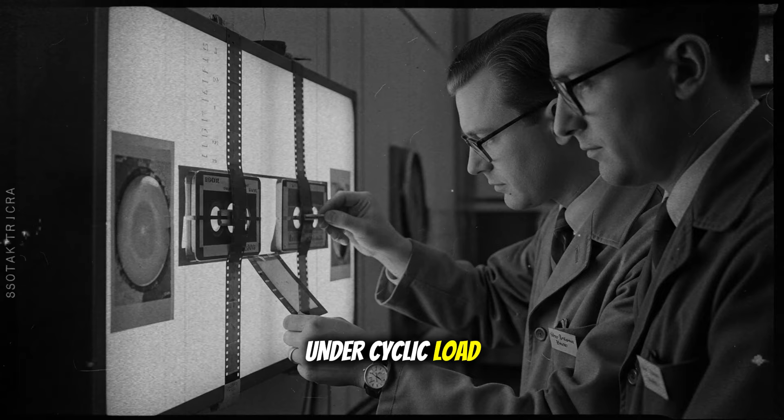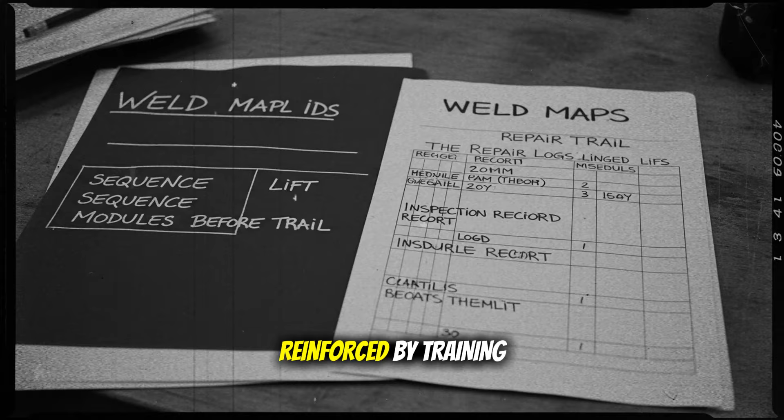Analytical studies and yard experience converged on the same conclusion: skip welding patterns, symmetry, and restraint reduce both distortion and stress, raising panel capacity before a ship ever meets the first winter swell. Every avoided continuous run was a line the ocean would not get to read back at speed when the temperature dropped and the hull went into a long, slow bend.

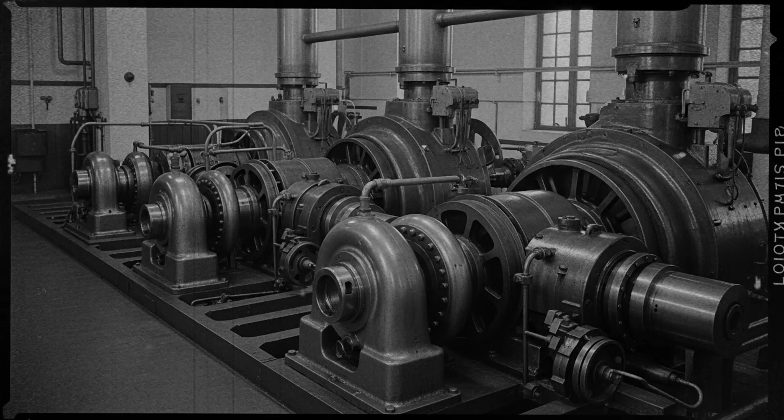Victory ships ran at 15 to 17 knots, a full stride faster than their predecessors, cutting exposure in dangerous waters and smoothing the timetable of a war that measured success in days gained and tonnage delivered. That speed came from modern oil-fired turbines and a more efficient hull, turning a cargo vessel into a ship that could keep pace with faster lanes and avoid the slow convoys that once made Liberty ships easy marks for submarines. Even before crews learned the new engine rooms by heart, they understood what 4 to 6 extra knots meant in the North Atlantic: fewer hours in the killing zones, and a logistics chain that finally stopped apologizing to the calendar.

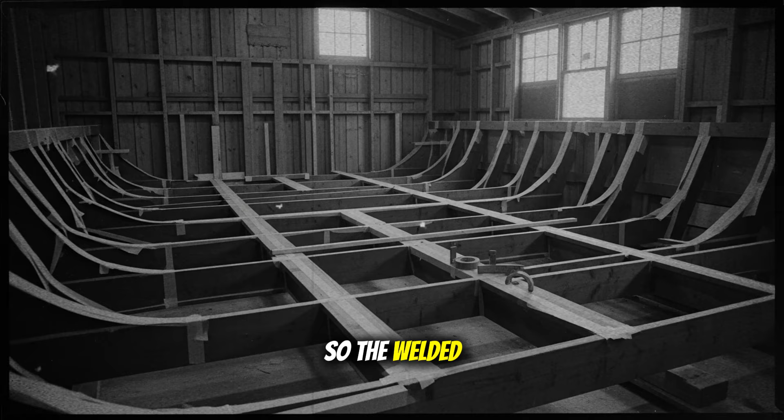But it wasn't speed alone that altered the story at sea. The structure itself had been changed to bend with weather rather than brace until something snapped, with frame spacing widened from 30 to 36 inches so the welded skin could flex without driving stress into the sharp corners and long seams that had betrayed earlier ships.

That one quiet number threaded through the hull, the rhythm of frames behind the plating, translated into a ship that rode heavy seas with less complaint and fewer of the sudden, merciless fractures that had once begun at a hatch corner on a cold night. It was an admission written into steel that a welded vessel needs deliberate flexibility, and that the best way to keep a crack from running is to give stress somewhere kinder to go.

Designers then seeded the deck and sides with deliberate interruptions, crack arrest features and improved details, so that if a flaw ever began, it would meet a wall rather than a runway, a change as plain as the rounded hatch corners and as hidden as the arresting strakes buried in the plating. A raised forecastle did its own quiet work, throwing less green water onto the well deck and taking the sting out of the repeated blows that fatigue a forward hull in winter, turning seakeeping into structural medicine before the doctor is needed. Even cargo arrangements, five hatches, seven sets of gear, electric winches, were laid out to move freight fast without carving stress traps into the path the metal would have to carry for months at sea.

The proof did not arrive in a single triumph but in the absence of familiar alarms, fewer urgent inspection reports, fewer cracks traced in chalk around hatch corners, fewer whispers in mess halls when the barometer fell and the sea began to lean on the hull. The casualty pattern that had dogged the Liberty fleet through winters, nearly 1,500 significant brittle fractures and a grim handful of dramatic breaks, receded as Victory ships took on the same routes with structures designed to distribute loads and halt flaws before they became headlines. Crews learned to trust the new rhythm of the ship, a confidence born not of optimism but of fewer bad surprises when the thermometer flirted with freezing and the deck went white with rime.

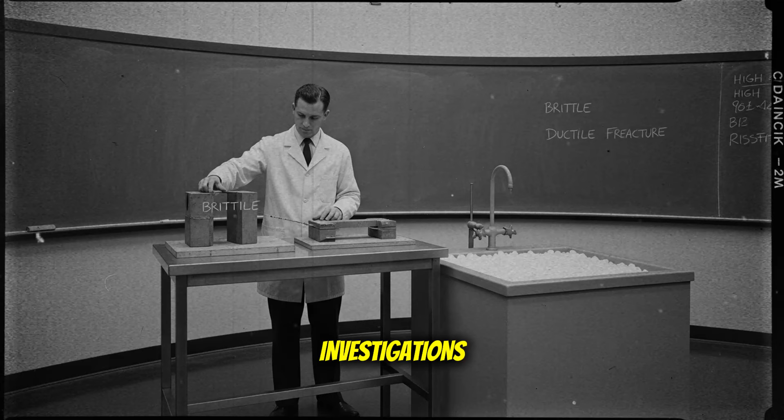In place of blame came fracture mechanics, born from wartime investigations and distilled by figures like Constance Tipper, who showed that low-temperature notch toughness, not just workmanship, was the decisive hinge between a hull that bends and a hull that breaks.

The Ship Structure Committee carried that new grammar into policy and practice, institutionalizing research and guidance so future ships would be drawn, specified, and built with the ocean's worst questions already answered on the page.

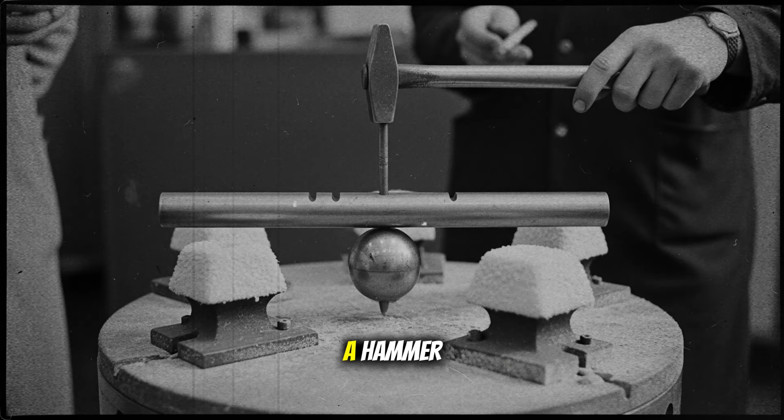The simplest tools proved the most powerful: a notched bar, a hammer, a temperature bath, and the Charpy curve that revealed where ductility fades into glassy fracture, allowing mills and navies to choose steels that keep absorbing energy at the very temperatures that once wrote Liberty tragedies in winter lanes.

From those curves came procurement rules and class requirements that tied acceptance to low-temperature impact performance rather than to ambient strength alone, turning specification into prevention instead of a paper mirror for good intentions.

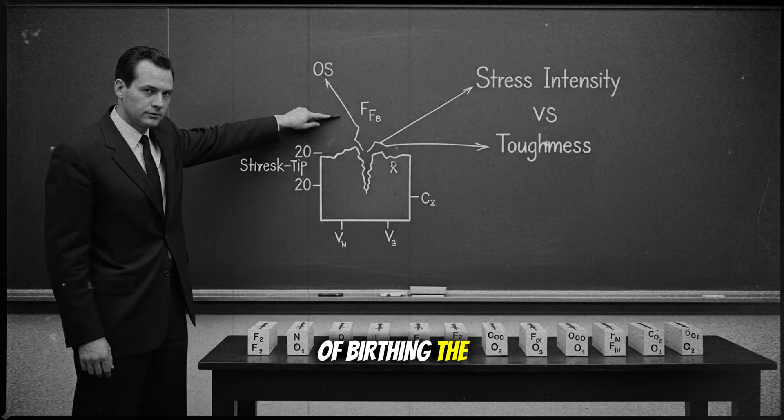The mills responded with fully killed, fine-grained carbon, manganese steels, cleaner, better balanced for weldability and toughness, so a deck corner in January had less chance of birthing the bright line that once sprinted across welded skins.

Fracture mechanics reframed design as a contest at the crack tip: keep the stress intensity K below the material's fracture toughness KC, blunt notches, and smooth geometry so loads are shared rather than hoarded at corners and intersections where winter loves to test a promise.

That is why later ships replaced rectangles with radii and wove crack arresters into welded continuity, the interruptions that turn a seamless road into a series of cul-de-sacs, so even a born flaw runs out of ambition before it becomes a disaster.

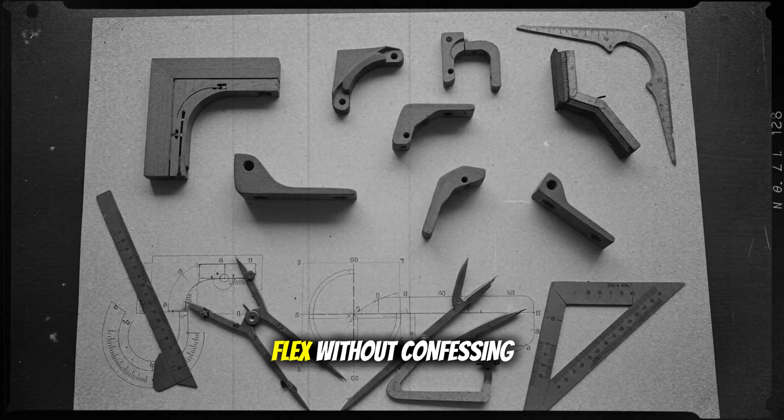These are not mere details, they are the map that stress is forced to follow, and when the map is drawn with mercy, a hull can flex without confessing weakness to the sea.

Constance Tipper's legacy is larger than a single class of ships. By demonstrating the ductile to brittle transition's role in sudden fractures, she helped steer engineering toward a discipline where temperature and notch sensitivity are first-class citizens in every design conversation.

The Liberty casualties became a case study for generations: how welded continuity amplifies crack speed, how square corners hoard stress, how service conditions define material choice, lessons still recited anywhere steel must hold its nerve in the cold.

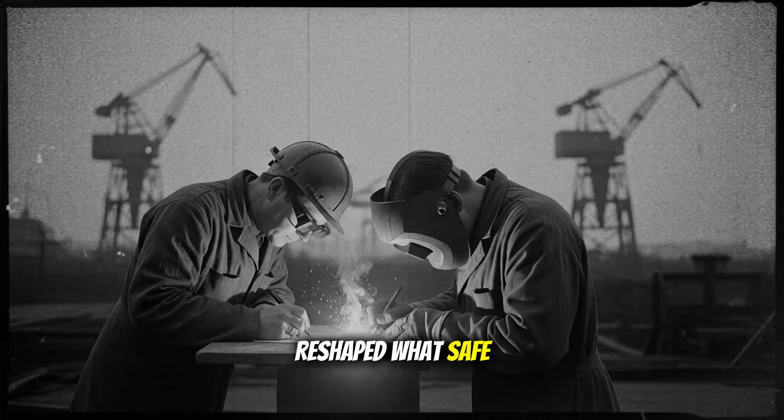History departments file the war stories, laboratories keep the data alive, and together they explain why a ship that once split at the pier reshaped what safe looks like when waves collect in February.

Standards absorbed the shock as they were meant to do, with welding codes evolving from simple workmanship guides into structured demands for procedure qualification, inspector training, and essential variables that govern heat, sequence, and acceptance in structural steelwork.

The modern AWS D1.1 lineage traces back to interwar and wartime efforts, then deepened through post-war revisions, codifying practice so that a neat bead is never trusted without the procedure behind it and the tests to prove it under the conditions that matter.

Codes do not build ships, but they keep the worst habits out of the shed, and they give inspectors a vocabulary sharper than doubt when a joint's future is in question.

The Ship Structure Committee persisted past the crisis because the sea never stops inventing new ways to ask old questions, commissioning studies from improved structural details to crack arrest strakes that quantify not only whether a fracture can be stopped, but where and under what loads it will stay stopped.

This body of work turned good ideas into design parameters—dimensions, placement, and thickness matching—so an arrestor can save a hull without becoming the next notch the ocean learns to use. It is meticulous, iterative, and unglamorous, which is exactly why it works when wind and water test the math.

The legacy radiated outward beyond shipyards, into any field where metal, cold, and stress conspire: bridge and building codes that respect notch toughness and detail categories, pressure vessel rules that tie plate acceptance to impact energy at service temperature, and pipelines specified for Arctic work with fracture control that begins at the mill.